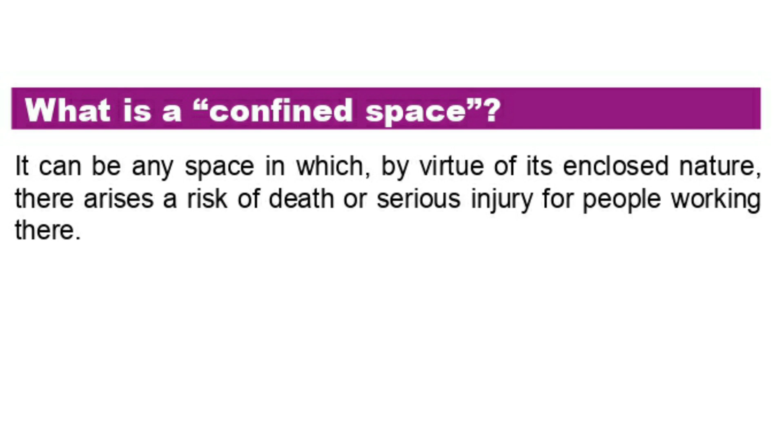What is a confined space? It can be any space in which, by virtue of its enclosed nature, there arises a risk of death or serious injury for people working there. Some confined spaces are fairly easy to identify, for example, enclosures with limited openings, storage tanks, silos, reaction vessels, enclosed drains, sewers, wells, tunnels, pits, caissons, shafts.

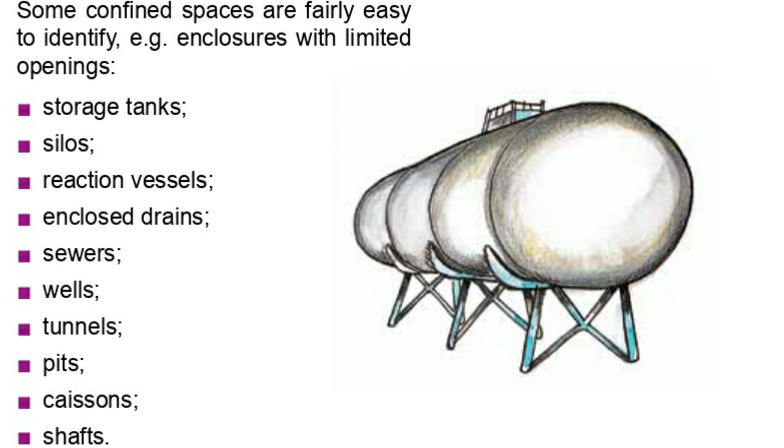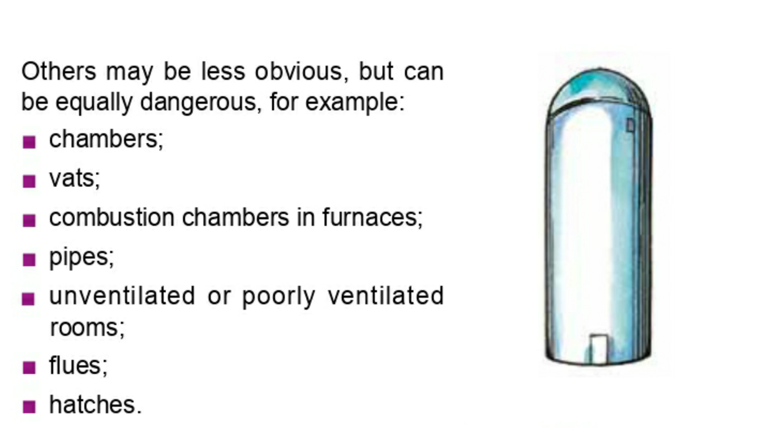Others may be less obvious, but can be equally dangerous, for example, chambers, vats, combustion chambers in furnaces, pipes, unventilated or poorly ventilated rooms, flues, hatches. It is not possible to provide a comprehensive list of confined spaces. Some places may become confined spaces when work is carried out, or during their construction, fabrication, or subsequent modification.

What are the dangers from confined spaces? Dangers can arise in confined spaces because of fire or explosion, for example, from flammable vapors, excess oxygen, etc., presence of dust in high concentrations, for example, in flour silos. Hot conditions leading to a dangerous increase in body temperature.

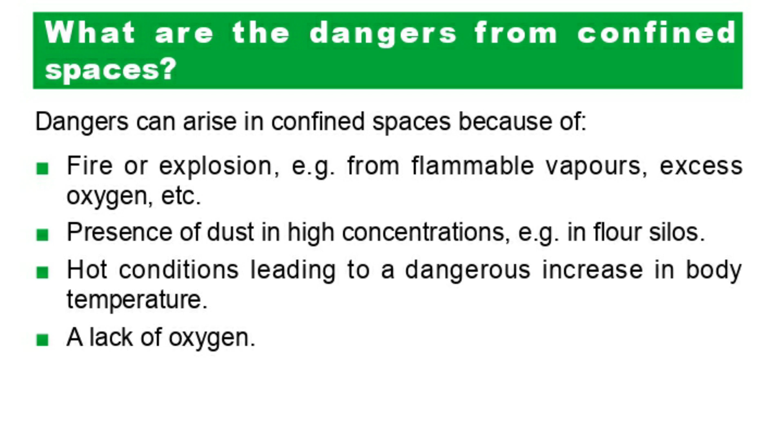A lack of oxygen. This can occur where there is a reaction between the soils and the oxygen in the atmosphere, resulting in the oxygen being used up by the soil ingredients. Where there is a reaction between the goods stored and the oxygen in the atmosphere, resulting in the oxygen being used up. Inside steel tanks and vessels when rust forms.

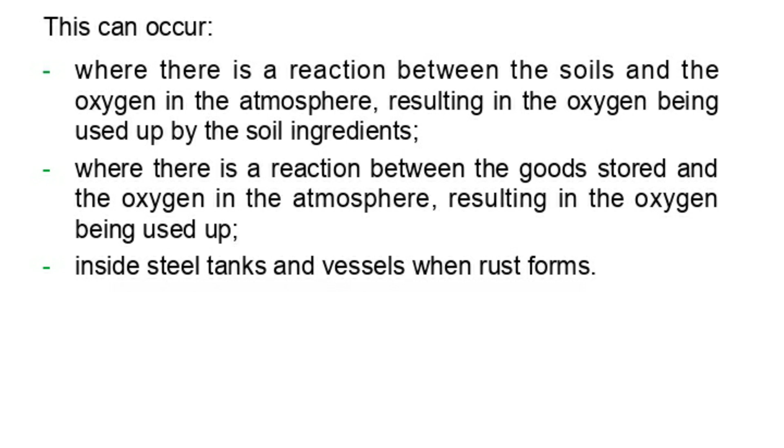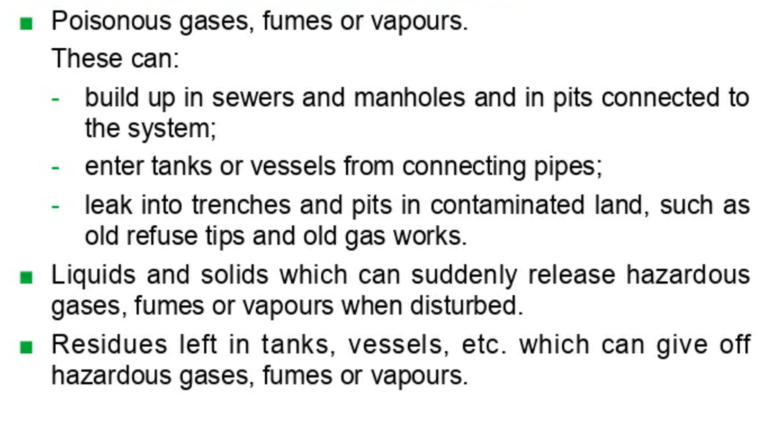Poisonous gases, fumes or vapors. These can build up in sewers and manholes, and in pits connected to the system. Enter tanks or vessels from connecting pipes. Leak into trenches and pits in contaminated land, such as old refuse tips and old gasworks. Liquids and solids which can suddenly release hazardous gases, fumes or vapors when disturbed. Residues left in tanks, vessels, etc. which can give off hazardous gases, fumes, or vapors.

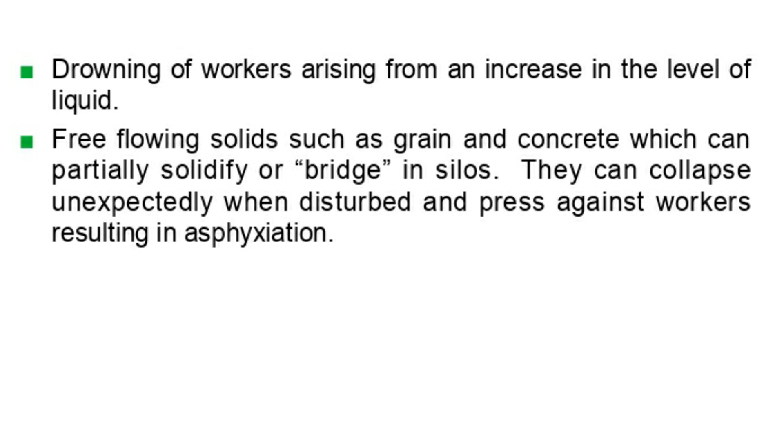Drowning of workers arising from an increase in the level of liquid. Free-flowing solids such as grain and concrete which can partially solidify or bridge in silos. They can collapse unexpectedly when disturbed and press against workers resulting in asphyxiation. Some of the above conditions may already be present in the confined space. However, some may arise through the work being carried out, or because of ineffective isolation of plant nearby, for example, leakage from a pipe connected to the confined space.

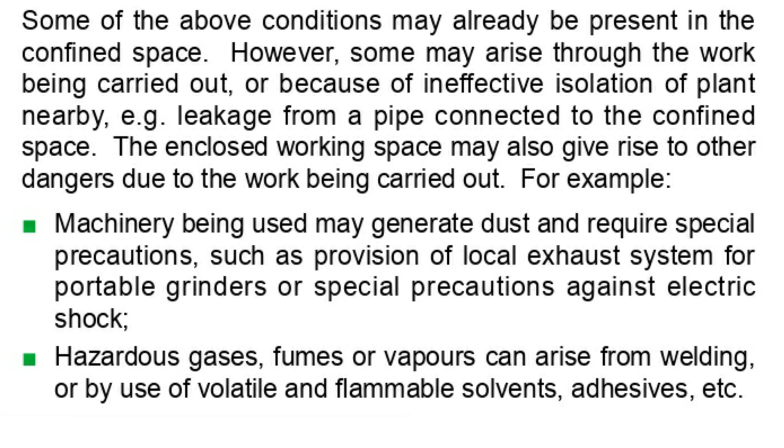The enclosed working space may also give rise to other dangers due to the work being carried out. For example, machinery being used may generate dust, and require special precautions, such as provision of local exhaust system for portable grinders or special precautions against electric shock. Hazardous gases, fumes or vapors can arise from welding, or by use of volatile and flammable solvents, adhesives, etc.

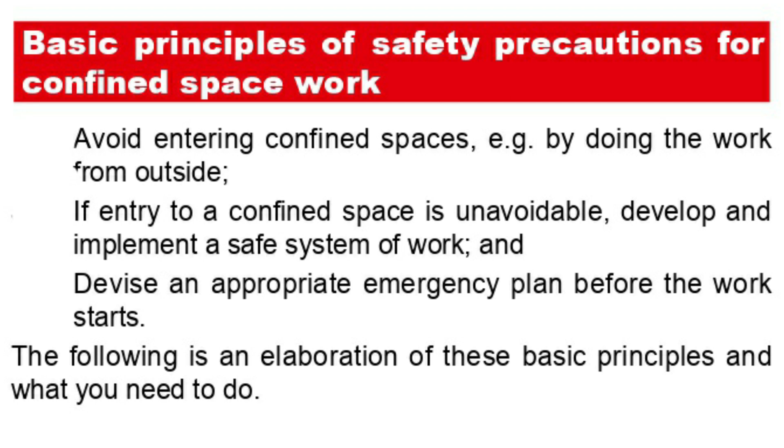Basic principles of safety precautions for confined space work. Avoid entering confined spaces, for example, by doing the work from outside. If entry to a confined space is unavoidable, develop and implement a safe system of work, and devise an appropriate emergency plan before the work starts. The following is an elaboration of these basic principles, and what you need to do.

Avoid entering confined spaces. You need to check if the work can be done another way, so that entry to or work in confined spaces is avoided. Better work planning or a different approach can reduce the need for confined space working. Ask yourself if the intended work is really necessary, or if you could modify the confined space itself or other plant to eliminate the confined space.

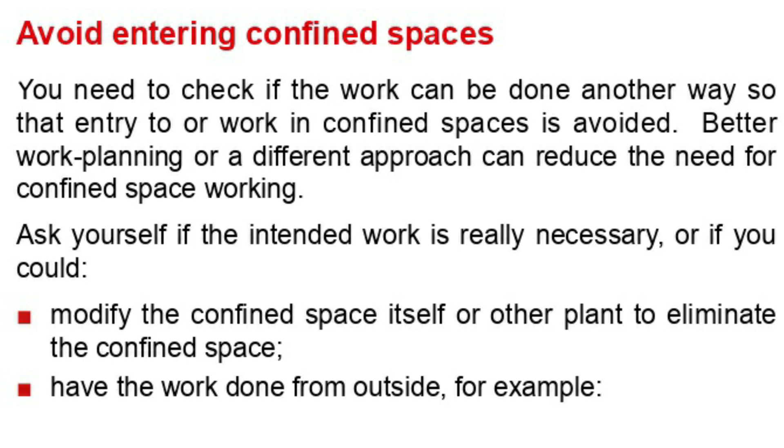Have the work done from outside. For example, blockages in silos can be cleared by use of remotely operated vibrators or air washers. Inspection, sampling, and cleaning operations can be done from outside the space using appropriate equipment and tools, and remote control monitors can be used for internal inspection of vessels.

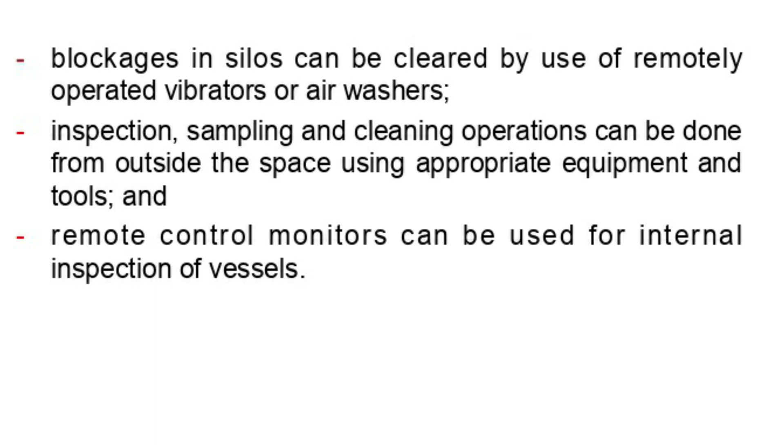Safe system of work. If entry to a confined space is unavoidable, a safe system for working inside the space should be developed. A competent person should be appointed to carry out a risk assessment of the conditions, and the work and activities to be conducted in the confined space, and identify the necessary safety precautions to be taken according to the findings, to avoid posing hazards to workers.

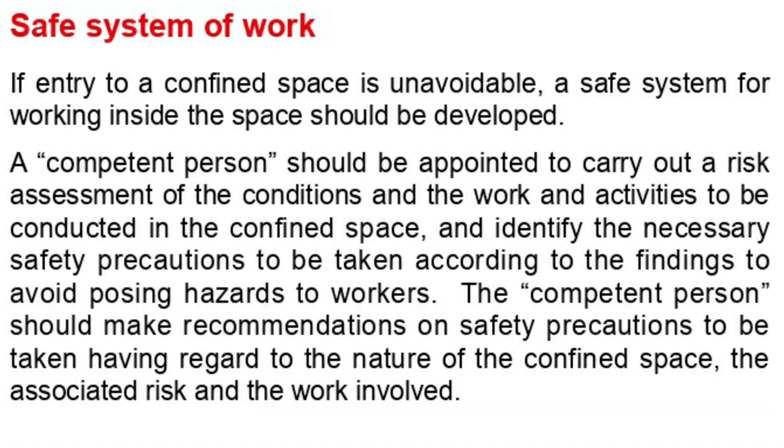The competent person should make recommendations on safety precautions to be taken having regard to the nature of the confined space, the associated risk, and the work involved. Make sure that the safe system of work, including the precautions identified, is developed and put into practice. Everyone involved will need to be properly trained and instructed to make sure they know what to do and how to do it safely. The following checklist is not intended to be exhaustive, but includes many of the essential elements for reference to help prepare a safe system of work.

Appoint suitable persons for the work. Suitable workers should meet the following requirements: have received training to become certified workers, have sufficient experience in the type of work to be carried out, have a suitable build for the work if the risk assessment highlights exceptional constraints as a result of the physical layout, be fit to wear breathing apparatus if the work requires the use of such apparatus, and there is no medical advice against an individual's suitability to work in a confined space.

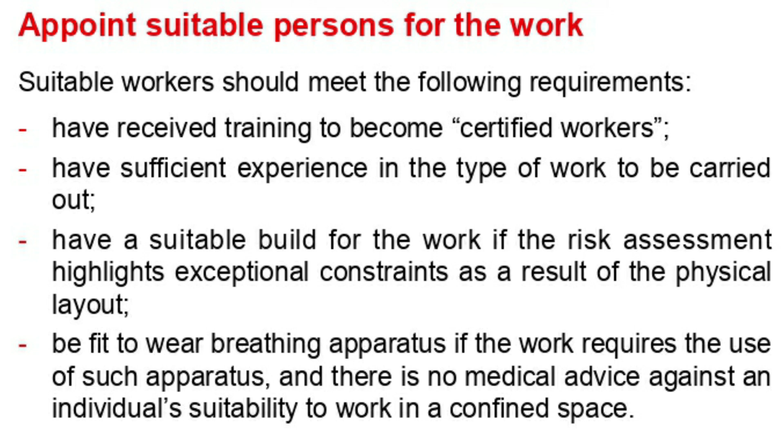Isolation. Disconnect and properly lock off the power supply of all the machinery and equipment that could cause hazards in a confined space. Blank off pipelines and service pipes with contents that could cause hazards. Take effective steps to prevent an ingress or inrush to the confined space of hazardous gas, vapor, dust, fume or free-flowing solid and liquid.

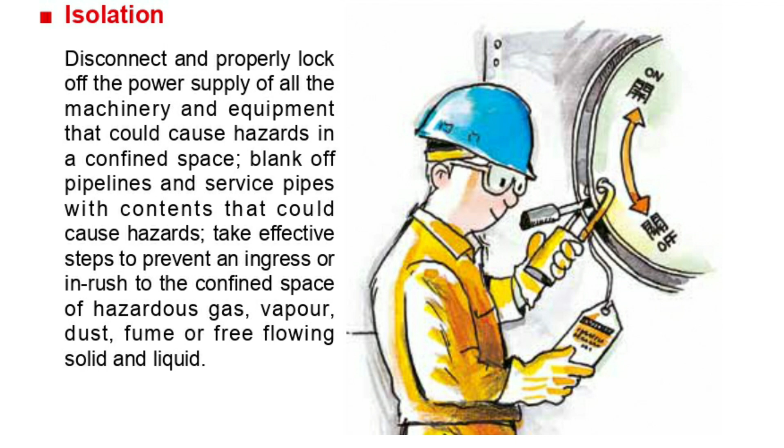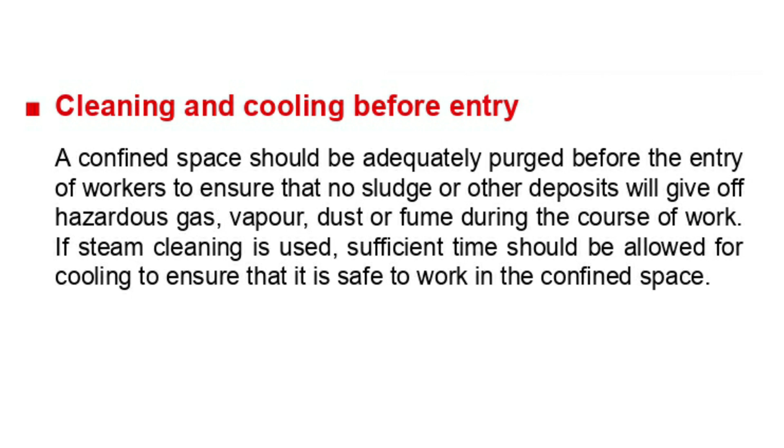Cleaning and cooling before entry. A confined space should be adequately purged before the entry of workers, to ensure that no sludge or other deposits will give off hazardous gas, vapor, dust, or fume during the course of work. If steam cleaning is used, sufficient time should be allowed for cooling, to ensure that it is safe to work in the confined space.

Check the size of the entrance. Is the entrance big enough to allow workers wearing all the necessary equipment to get in and out easily, and provide safe access and egress in an emergency? For example, if the entrance is narrow, airline breathing apparatus should be used instead of self-contained breathing apparatus, which is more bulky and therefore restricts passage.

Provision of ventilation. You may increase the number of openings and therefore improve ventilation. Mechanical ventilation may be necessary to ensure an adequate supply of fresh air. Do not use oxygen to freshen the air inside the confined space, as this will greatly increase the risk of fire or explosion.

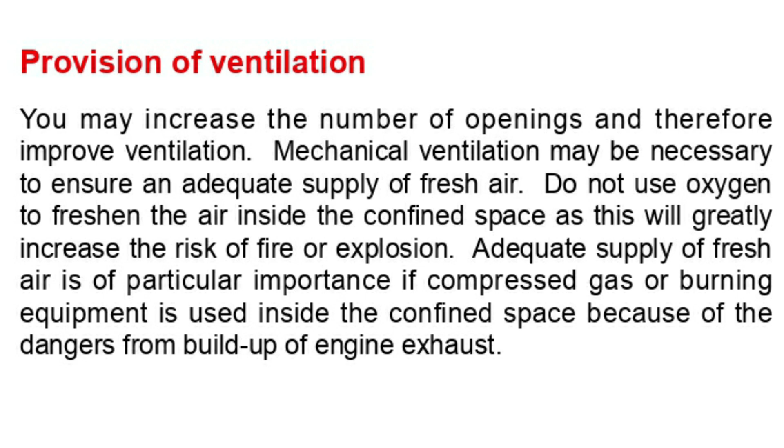Adequate supply of fresh air is of particular importance if compressed gas or burning equipment is used inside the confined space, because of the dangers from buildup of engine exhaust. Warning: exhaust from fueled engines contains carbon monoxide, which is so dangerous that use of such equipment in confined spaces should never be allowed.

Testing the air. This is necessary in order to check that the air is free from both toxic and flammable gases, that there is no deficiency in oxygen, and the air is fit to breathe. Testing should be carried out by a competent person using a suitable gas detector, which is correctly calibrated. Where the risk assessment indicates that conditions may change in the course of work, or as a further precaution, continuous air monitoring as advised by the competent person is required.

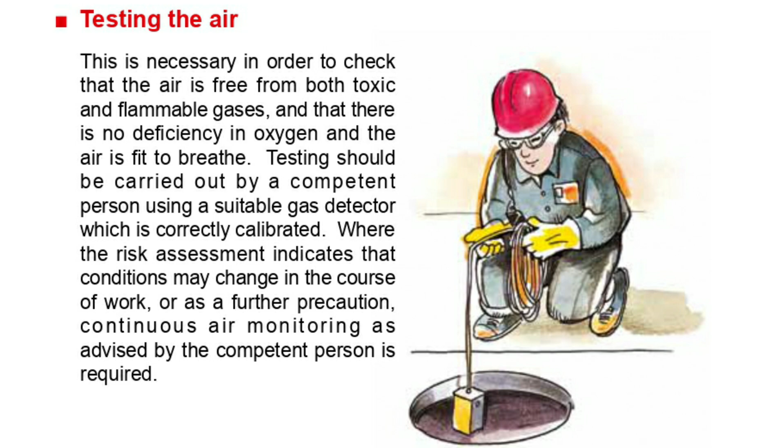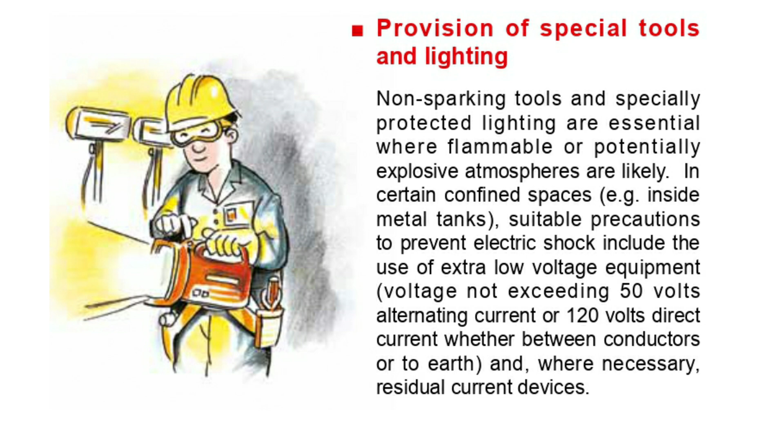Provision of special tools and lighting. Non-sparking tools and specially protected lighting are essential where flammable or potentially explosive atmospheres are likely. In certain confined spaces, for example, inside metal tanks, suitable precautions to prevent electric shock include the use of extra low voltage equipment, voltage not exceeding 50 volts alternating current, or 120 volts direct current, whether between conductors or to earth, and, where necessary, residual current devices.

Provision of personal protective equipment, where the use of approved breathing apparatus is recommended in a risk assessment report, or entry into a confined space for underground pipework is required. It is required to ensure that any person entering or remaining in the confined space is properly wearing an approved breathing apparatus of a type that gives appropriate protection given the nature of the confined space.

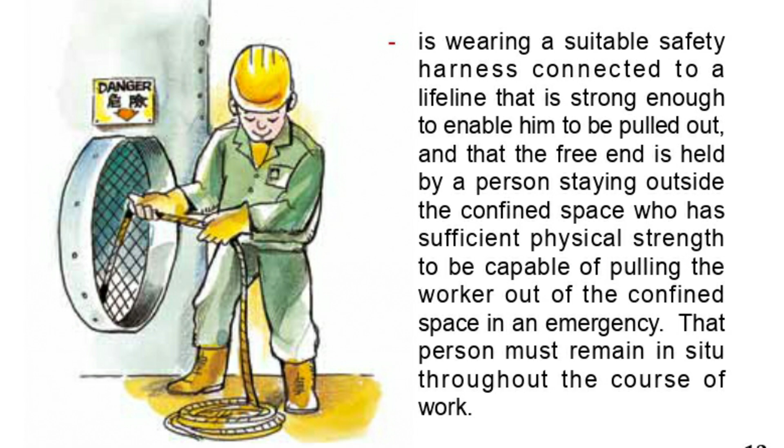Is wearing a suitable safety harness connected to a lifeline that is strong enough to enable him to be pulled out, and that the free end is held by a person staying outside the confined space, who has sufficient physical strength to be capable of pulling the worker out of the confined space in an emergency. That person must remain in situ throughout the course of work.

Issuance of safety certificate. You must issue a safety certificate, which ensures that all the safety precautions are in place, and a formal check has been undertaken before workers are allowed to enter or work in the confined space. The certificate specifies the period during which workers may remain safely in the confined space. It is also a means of communication between site management, supervisors, and those carrying out the hazardous work.

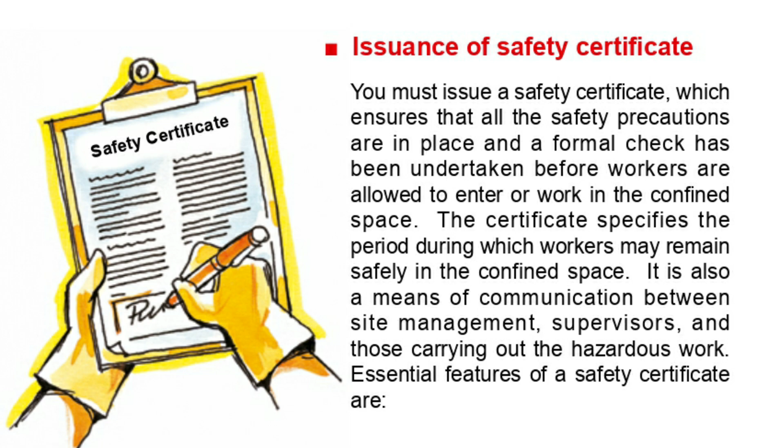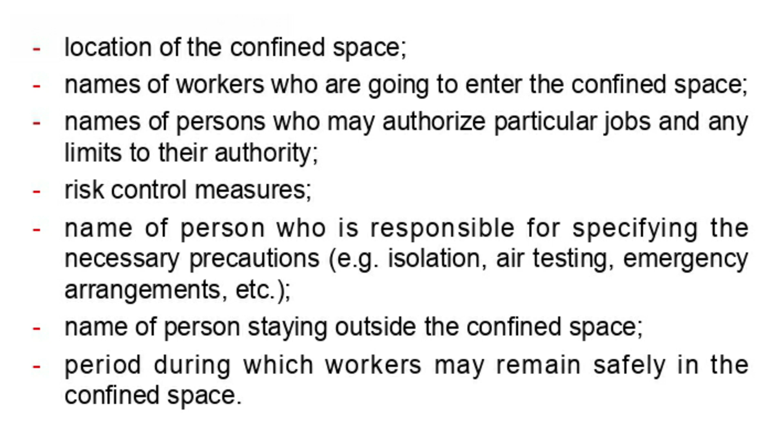Essential features of a safety certificate are: location of the confined space, names of workers who are going to enter the confined space, names of persons who may authorize particular jobs, and any limits to their authority. Risk control measures. Name of person who is responsible for specifying the necessary precautions, for example, isolation, air testing, emergency arrangements, etc. Name of person staying outside the confined space. Period during which workers may remain safely in the confined space.

Emergency plan, to deal with any serious and imminent danger to workers inside a confined space. Appropriate emergency procedures should be formulated and implemented according to the nature of the confined space, the risks involved, and the nature of an emergency rescue. Provide and keep readily available in a satisfactory condition a sufficient supply of approved breathing apparatus, suitable reviving apparatus, vessels containing oxygen or air, safety harness and ropes, an audio and visual alarm for alerting others outside the confined space.

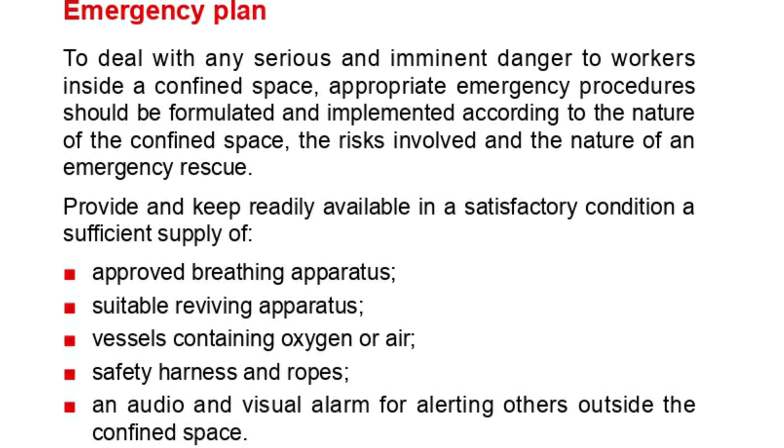You should consider the following communications. How can an emergency call be communicated from inside the confined space to people outside so that rescue procedures can start? Don't forget that an emergency may occur during night shifts, weekends, and times when the premises are closed, for example, public holidays. Also, consider what might happen and how the alarm can be raised.

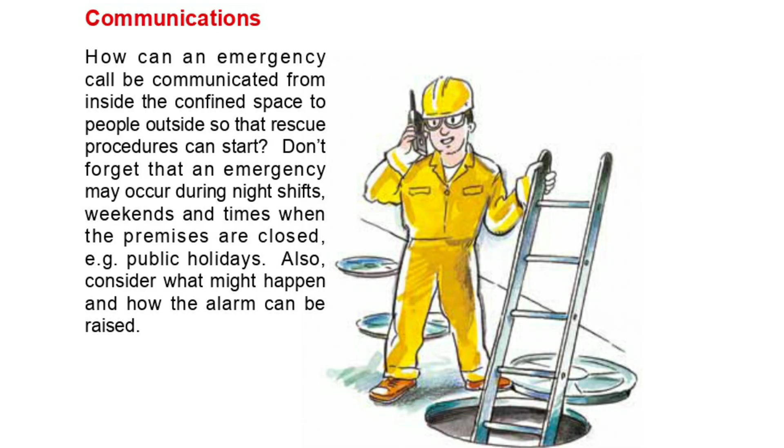Liaison and rescue. When work is being carried out in a confined space, another person should be assigned to station outside the confined space to maintain communication with the worker inside. Sufficient number of rescue personnel should also be made available outside the confined space. These persons need to be properly trained in rescues, physically fit, and readily available to carry out rescue tasks, and capable of using any rescue equipment provided, for example, breathing apparatus, reviving apparatus, lifelines, and firefighting equipment. They should also be adequately protected against any harm.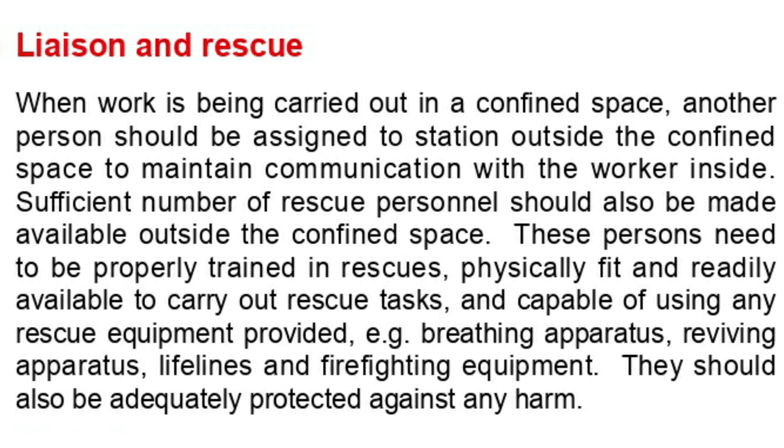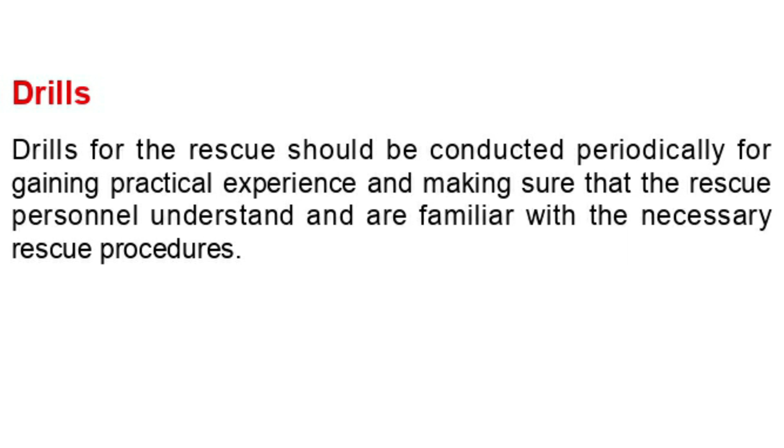Shut down. It may be necessary to shut down adjacent plant before attempting emergency rescue. First aid procedures. Qualified first aiders need to be available to make proper use of any necessary first aid equipment provided. Drills. Drills for the rescue should be conducted periodically for gaining practical experience and making sure that the rescue personnel understand and are familiar with the necessary rescue procedures.

Emergency services. Procedures to notify emergency services departments, for example, Fire Services Department, in case of an emergency, should be formulated in advance. Preparation should also be made to provide these emergency services departments with relevant information on their arrival to help them understand the dangers in the confined space.